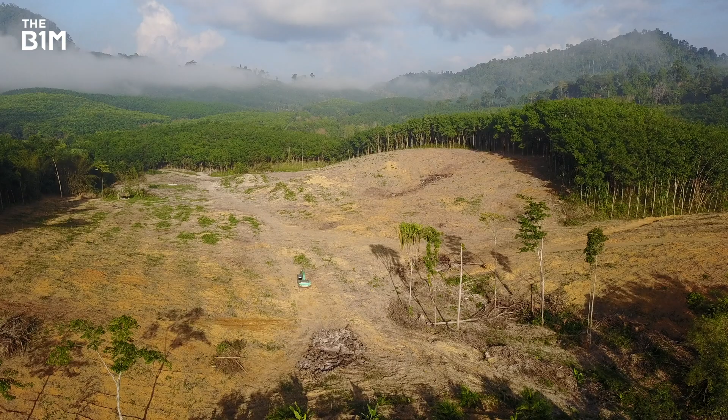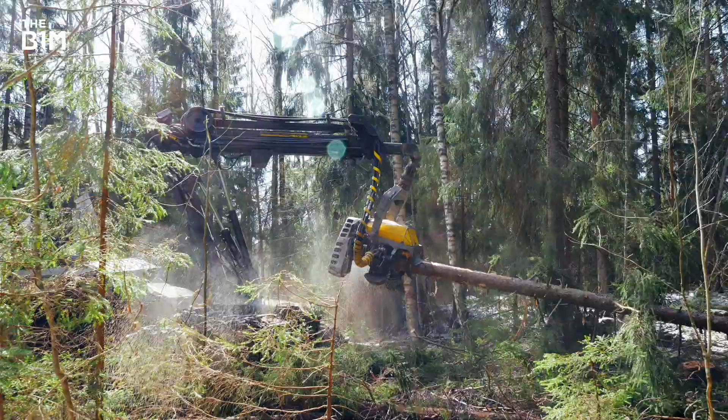But now, in the space of just one human lifetime, all that has changed. The extent of our urban development has reached extreme levels, and our buildings now contribute more than 40% of all greenhouse gas emissions. Our actions are causing dramatic and irreversible changes to the planet that we call home. The critical links between ecosystems are being broken.

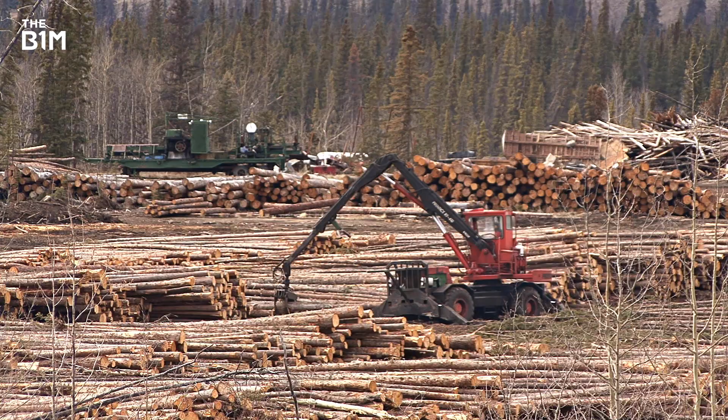But we have the power to turn this tide. We have the ability to limit the impact of the structures we build and to help them support rather than destroy our planet. The construction industry can make the difference, and with the help of new cutting-edge technology placed into the hands of billions, we can save our planet for future generations.

Urban development is one of the main ways that human beings impact the Earth. From the structures that we call home, to our schools, hospitals, workplaces, and the infrastructure that we travel on, our built world now accounts for a significant portion of all greenhouse gas emissions produced worldwide.

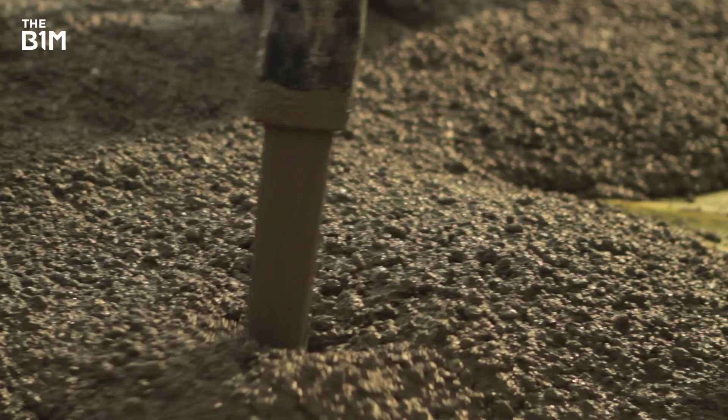From initiatives to make entire cities carbon neutral, to innovations in concrete manufacture and even smog-eating buildings, the construction industry is beginning to recognise its role and respond. But much more needs to be done, and at a faster rate.

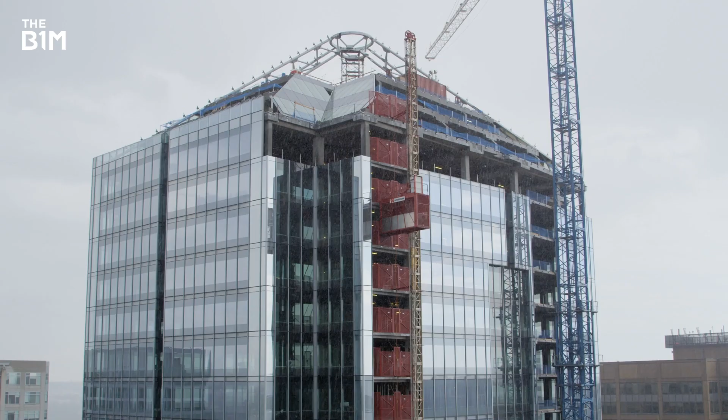To make a real difference, we must reach beyond the construction sector and enable each and every one of us to better understand how our buildings are impacting the planet.

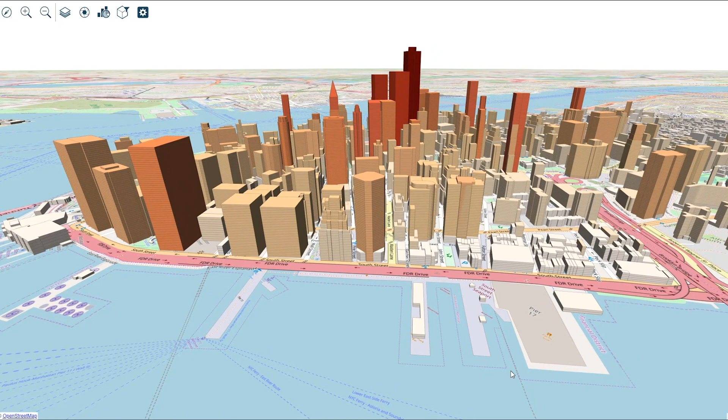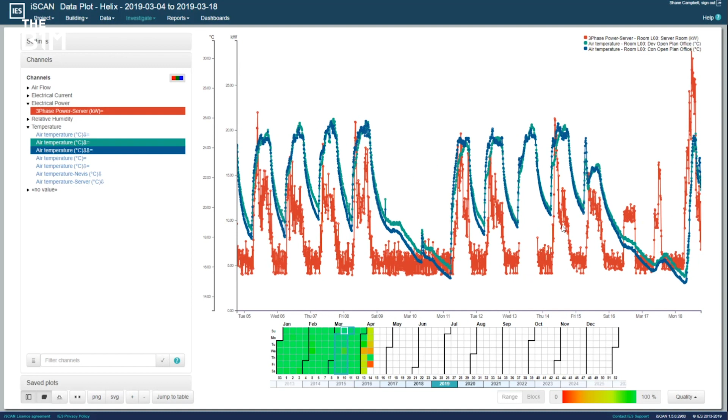Technology can play a key role here, particularly in the form of the digital twin systems that have supported other sectors for many years. Creating a digital replica of a physical building that actually behaves like the real structure and provides crucial information on real-life performance can enable us to better understand how our buildings are performing and simulate how they may perform in the future under a range of scenarios.

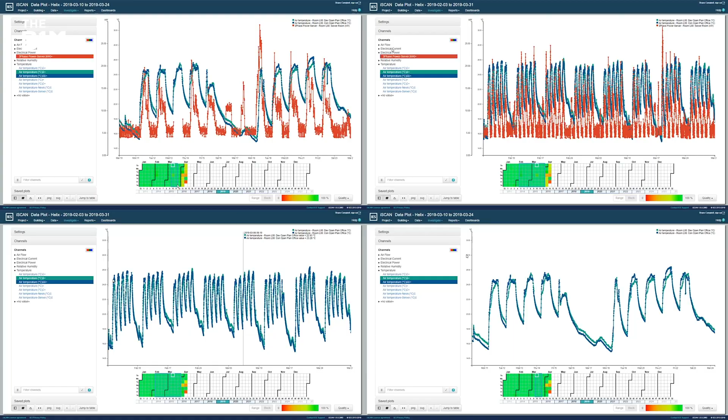Leveraging artificial intelligence and machine learning, these so-called digital twins can improve energy resilience, reduce operating costs, increase resource efficiency, and help to decarbonise our buildings. When applied across a group of structures or even an entire community, we could start to analyse and improve our energy use at a societal level, reducing our impact on the planet.

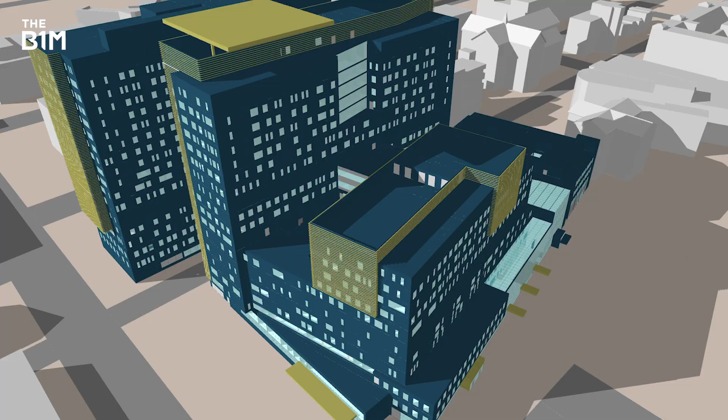Digital twin technology for buildings is available and in use on real projects right now. Systems like the Intelligent Communities Lifecycle, or ICL Environmental Digital Twin, developed by IES, combine building simulation and machine learning to provide insights on energy usage, waste heat, renewables, occupant comfort, and even transport connectivity.

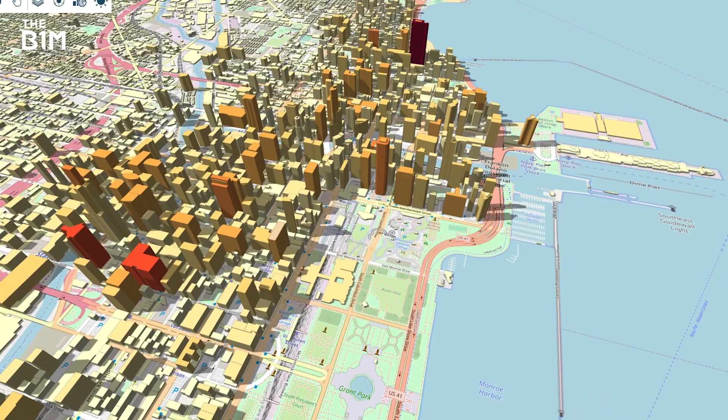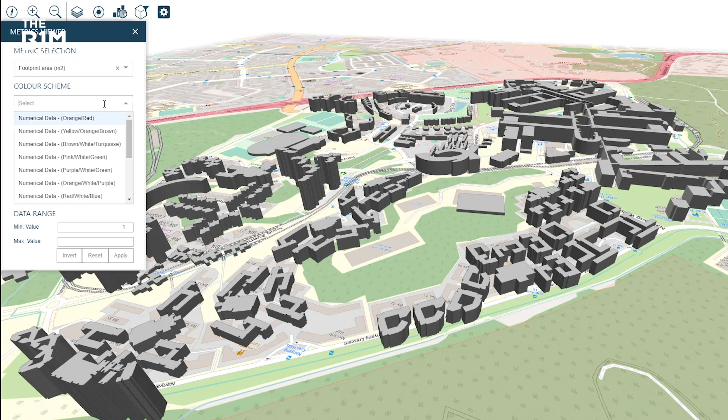The ICL can replicate reality by simulating the physics of energy and heat flow throughout a building or a collection of buildings. Any gaps in real-world data can be filled with projections developed by the intelligent digital twin itself.

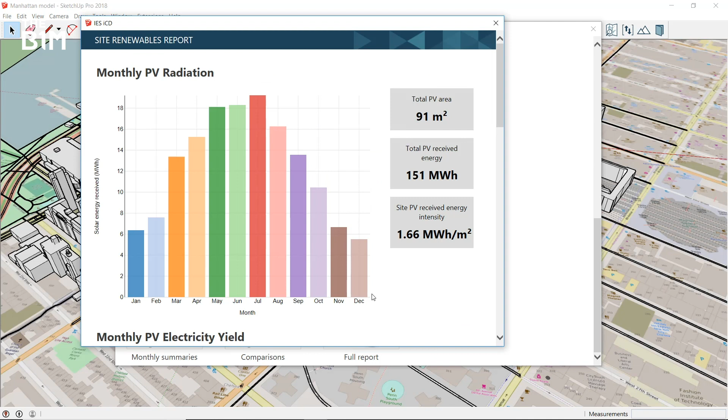Such systems allow energy and resource use in buildings to be clearly visualized, reaching beyond the barriers of complex engineering and engaging everyday people, from children to those who previously had little awareness of how our buildings can impact the planet and their lives. The main reason to do this is because, of course, we want to improve buildings.

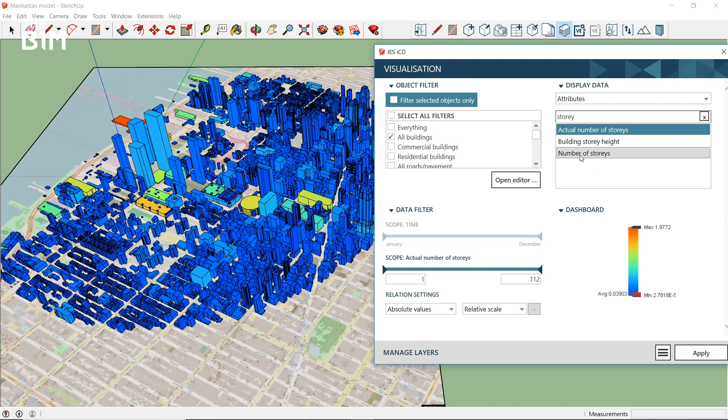Lord Kelvin used to say, you cannot improve it if you cannot measure it. And so that's what the virtual build, the digital twin, allows you to do. It gives you a virtual prototype of the building that first of all allows you to measure it, but also allows you to test, to experiment on it without having to experiment on the real building.

Because the data is available, it means that we can use the data to share. And when we share, we make this information public. So we educate the public, and we hopefully create more engagement. That's what we need to solve, let's say, climate change, to improve the climate.

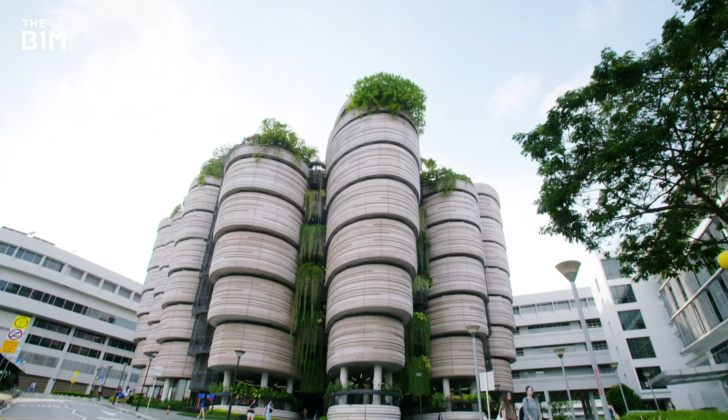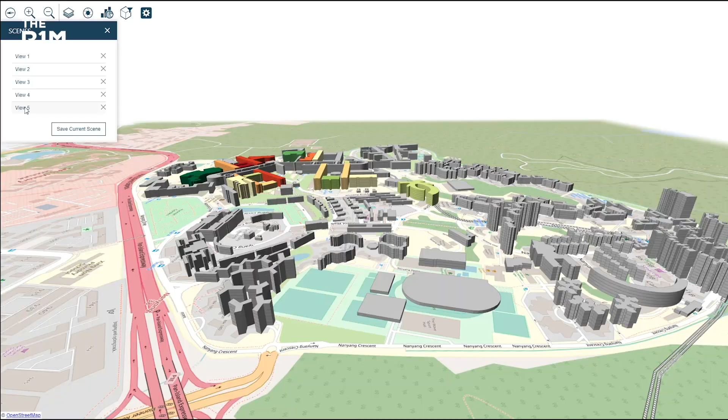With ambitions to become the greenest campus in the world by 2020, Nanyang Technological University have deployed IES's ICL technology across their 200-hectare flagship eco-campus in Singapore. Initially, IES created a master planning model of the entire campus site, accurate to 91% for total energy consumption. That model was then used as a baseline for high-level analysis on a number of energy reduction technology trials.

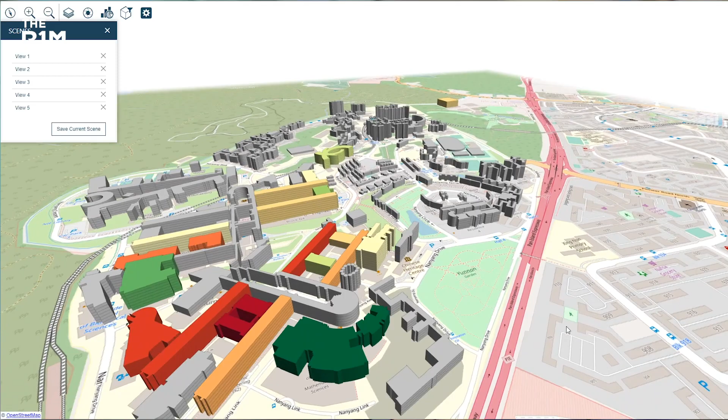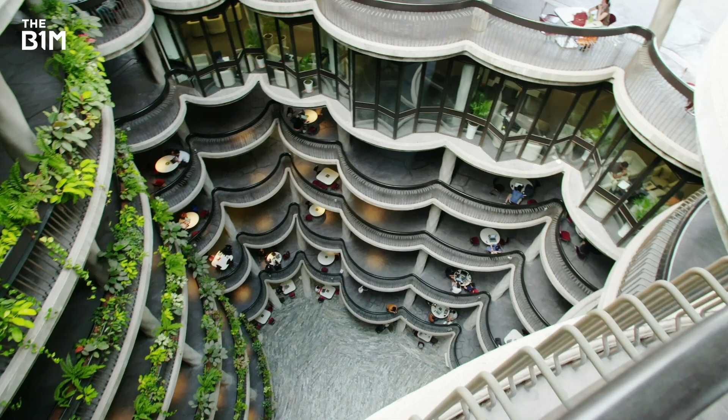They had this vision. They wanted to improve the performance of their campus. They said, let's first create a very high-level master planning view on our campus and just tackle the low-hanging fruits. So are we using a set point that maybe is too low? Are we keeping the rooms at 17 degrees rather than a more manageable 23, 24 degrees?

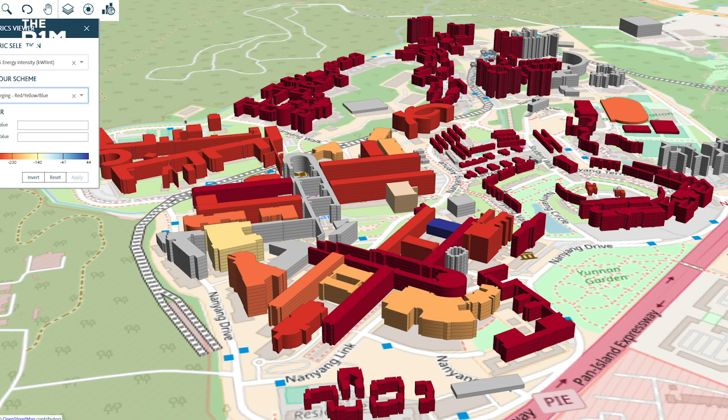A very simple intervention that, after 1 year of resetting all the parameters, already managed to save around 10-15% of the energy. This allowed them to analyze and test the impact of changes, something that cannot easily be replicated on site without using the digital twin.

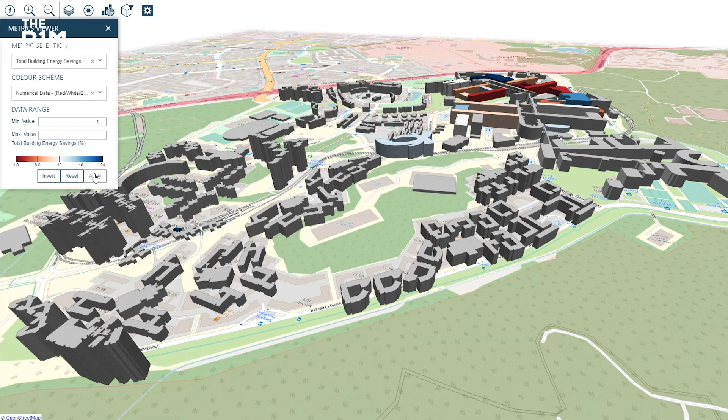In total, the use of IES technology revealed a potential reduction in energy consumption of 30%, equating to potential savings of over 4.75 million Singapore dollars.

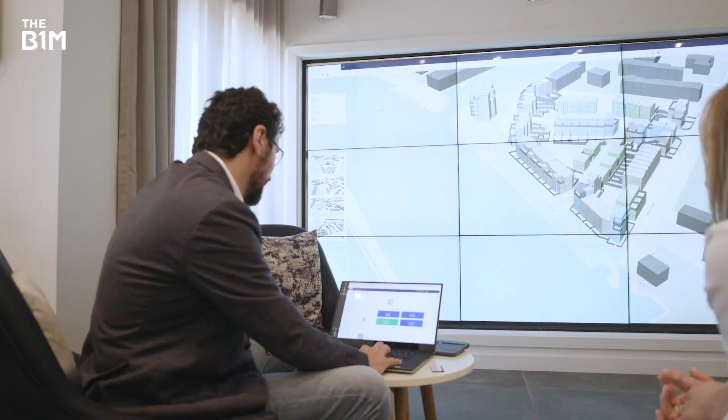IES's digital twin technology is currently in use on residential schemes as well. Trent Basin is a model low-energy community in Nottingham in the UK. Here, IES works with experts at the University of Nottingham to create an interactive platform that allows the community to visualise its energy data in real time.

Trent Basin is an area of the city of Nottingham on the banks of the River Trent. It used to be an industrial area of the city and is now being redeveloped for low-energy housing, as near zero carbon as they could achieve. So there's lots of energy efficiency technologies and design elements that have gone into the housing.

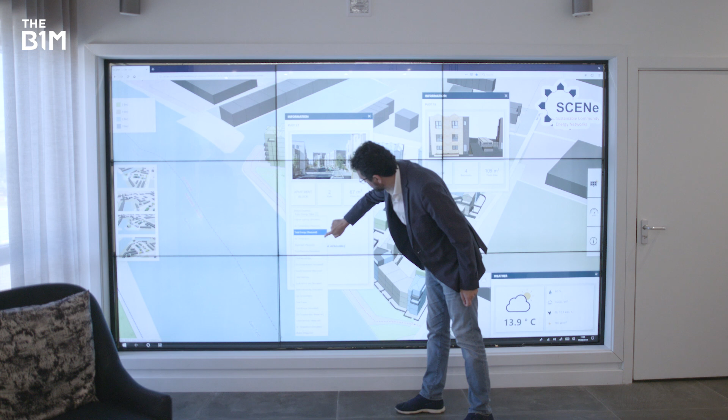Residents can interact with the platform online or at a large touchscreen in their community hub, moving around the virtual site, seeing the amount of energy being generated and their energy use. What the architect was interested about was creating engagement with the people that live in the community.

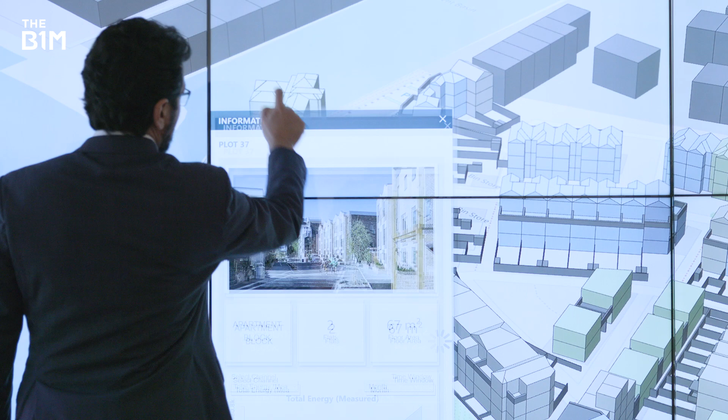They know they've designed sustainable buildings, so they wanted to allow residents to interact with the digital building. The main thing was to visualize the data and make it more accessible, presented in a friendly way, to inform and engage residents about the energy use: what has been produced, what has been consumed, and what has been stored in the development.

The platform means that residents can interact with and comprehend their energy use like never before, driving behavioural change. You can really interact with a 3D model. Sometimes for people not from an architecture background, it's difficult to visualize 2D sketches or 2D drawings, and the 3D interactive platform actually helps a lot.

When you live somewhere where you're generating your own electricity, living in a well-insulated home with lots of energy efficiency features, it starts to make you think more about your own living and your own environment. It's also highly engaging for children, immersing them in the concepts of responsible energy management from a young age.

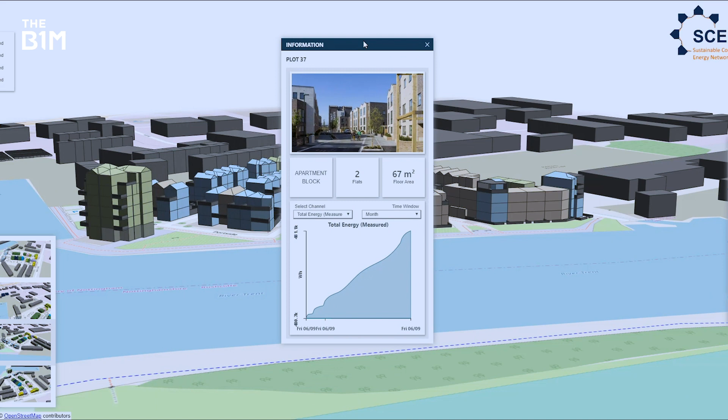The platform was created to be inclusive and self-explanatory, allowing children and people with reduced mobility to use the platform and interact with energy in a way they never interacted with before.

Residents can go and touch the various buildings and see not only what the building looks like and the main properties of the specific apartment or house, they can also see what the current energy consumption is or what the temperature is.

We generate our energy locally using photovoltaic technology, solar panels. That electricity is generated locally and then stored locally in a large battery. At the time it was installed, it was Europe's largest community energy battery.

Over the past year since this has been running, we've reduced an awful lot of carbon dioxide emissions associated with conventional generation. The potential impact of this technology on a planet facing such an urgent climate emergency is considerable.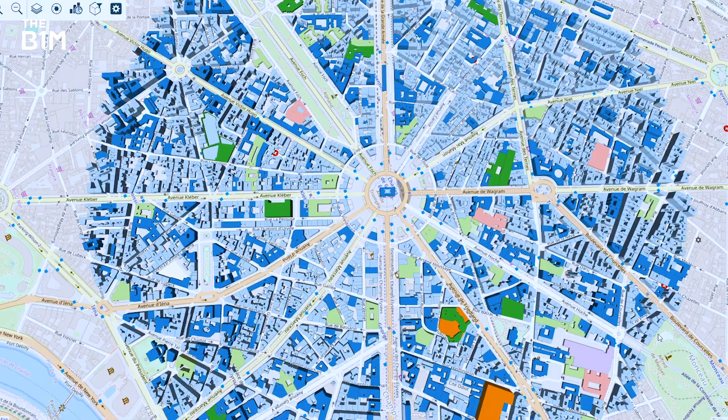Systems like the ICL can help us better understand how our built world is performing and provide insight on how to improve it. It's not just about having the technology running in the background, it's actually taking the residents on the journey as well.

If we could integrate this technology into all the buildings within a community and then replicate that across multiple communities around the world, we could make a significant reduction in carbon output at a global level. The widespread adoption of such technology would also drive behavioural change, not just among the current population, but with future generations, enabling them to care for our planet long into the future.

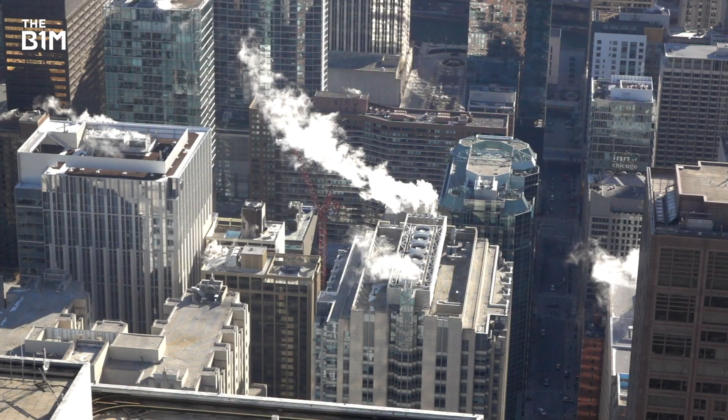Our biggest challenge as a country is how we decarbonise heat, how we get gas out of buildings, and how we generate heat for the built environment. One of the things we're looking at here in Trent Basin is how we can get maximum value out of on-site renewable energy generation, how we store that locally, and how we can interact and trade between the heat and electricity we're generating here, to optimise an entire system for the provision of both heat and power.

While the climate emergency currently facing our world is extreme, it is the construction sector that can make a key difference in turning the tide. With technology as our key ally in this fight, we can develop a more sustainable built environment, helping our planet to recover and thrive.